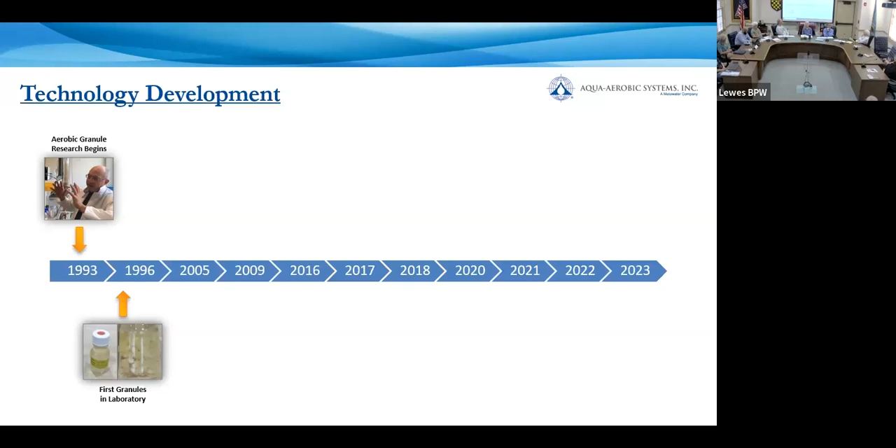But this actually started out born from anaerobic granules—they wanted to see if they could do this on the aerobic side of treatment, and they were able to. It did take a few years, and I think Mark won a bet with another professor, which meant he got a few beers at Oktoberfest that year. Then they partnered with Royal Haskoning DHV, an engineering conglomerate also based out of the Netherlands, and scaled this up into a full-scale commercial system. The first couple of installations were in 2005 and 2006 at industrial sites—edible oils and food processing.

In '09, they started up their first municipal plant in South Africa, and shortly after that, a number of plants in the Netherlands, and it has since expanded globally. It took a little bit longer, however, for them to make their way into North America.

Just how we work projects is a little bit different than what's done overseas, apparently. So they partnered with the manufacturer, and Aqua Aerobic Systems has a pretty long history with biological treatment with SBRs, and obviously have a decent standing in the wastewater community in the US and Canada. So we've been working with this for a number of years.

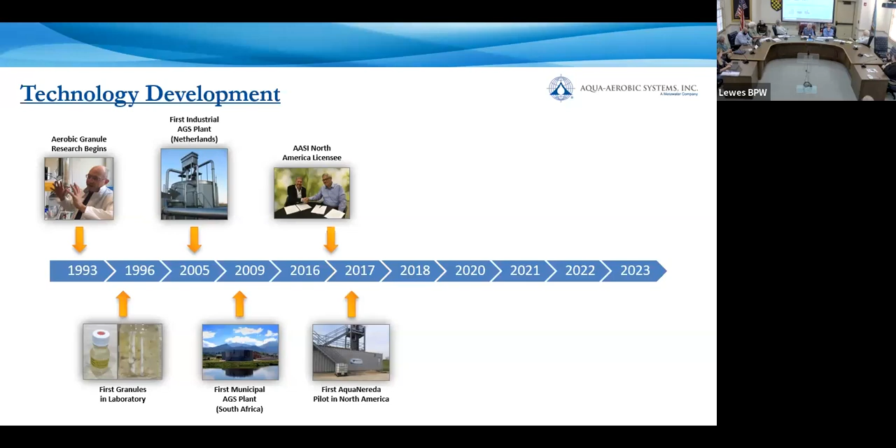And notably, did some piloting, started up a demonstration reactor in Rockford, Illinois, which is where we're based out of. So this is at the Rockford treatment plant. It's a 40 MGD facility, so a little bit bigger than what you guys have in Lewes. That's been running for about 5-6 years now, and it's operated by our R&D department. We use that for R&D purposes, customer visits, operators to come out and get accustomed to the equipment and control structure before they start up a plant.

So it's been very beneficial for Aqua. And actually what they're doing now is they began construction a few weeks ago on a 10 MGD Nereda expansion at their site. So they'll have their 40 MGD flow through just aeration basins, and then we will have that Nereda off to the side to take on some additional flow.

Back in January of 2020, we started up the first commercial installation in the United States down in southern Alabama. This is the Redneck Riviera down here. They're only about 20 miles from the Gulf Shore. And that's been run by, they call it the Redneck Riviera.

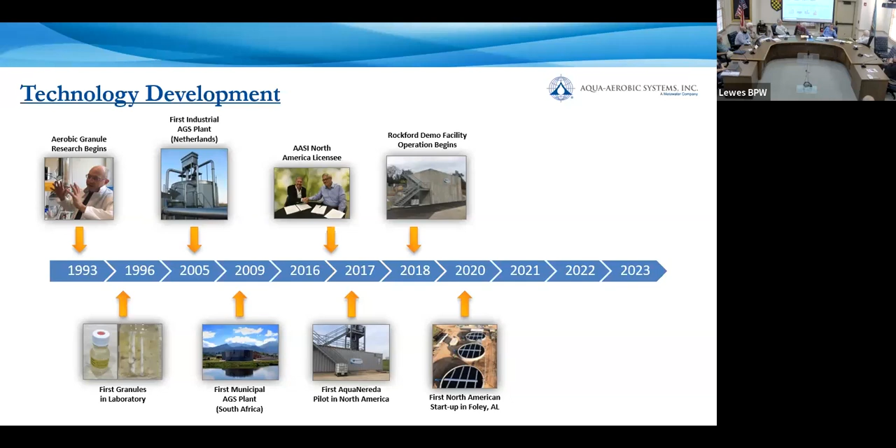It's not derogatory. That's not you. That's Justin, yeah. So the superintendent down there, Lee, he's actually had his eye on this technology for a few years. We were not licensed yet, and he had gone to the Dutch and asked, 'Can I get this?' They said, 'Well, no, we don't have a means of selling it to you right now.' So he was chomping at the bit to get his plants moving in this direction.

So we'll hit on that a little bit. 2021, there were 4 startups. One of those was just a 1-year-long demonstration for direct potable reuse in Oklahoma. They just presented a paper at WEFTEC this year.

Wolcott, Kansas was started up January of last year. And then this year, we are currently in the middle of startup 3 of 4. So it's been a big year for us. And we'll see that number probably be around 3 to 4 startups for the next couple of years, really seeing the technology grow.

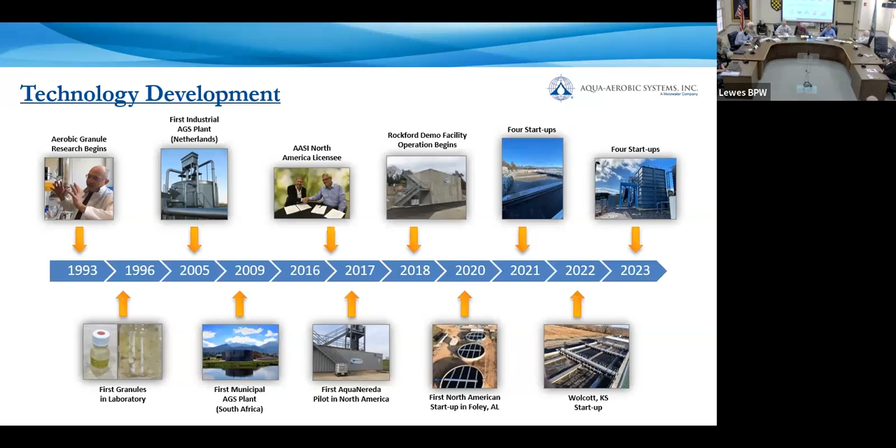So internationally, there are 70 plants running, maybe 71, depending on how my emails look at the end of the day. About another 30 to 35 under contracts. That means they're under design or under construction.

Again, global technology, it's been around for quite some time now - 20 countries, not quite on all the continents yet. I can give you guys the one that we're not going to be building on anytime soon. With that being said, though, there's a couple in Australia, Hong Kong, and Jeddah, Saudi Arabia is going to be quite large, so it has become fairly expansive.

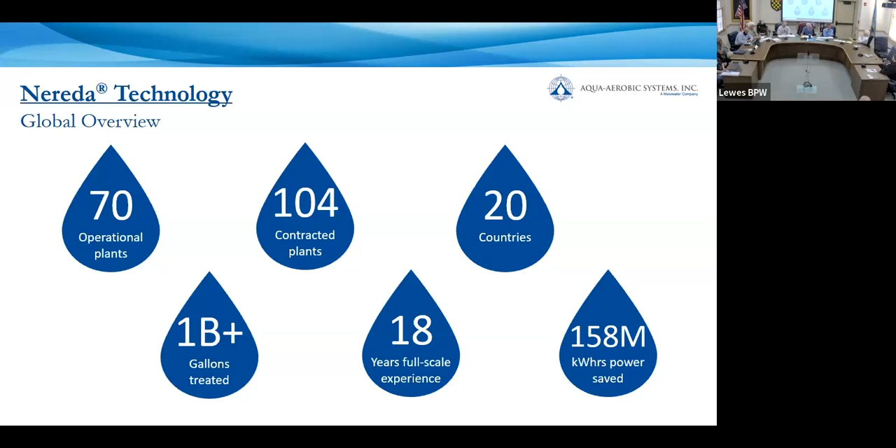And of course, the US and Canada will open a whole other door here.

Since 2020, how much has changed in the technology or the application? That's a good question. Application, not drastically different for the technology itself. I will mention that we do our own R&D work, even though we aren't the actual owners of the technology - we're really in a partnership with Royal Haskoning. Now they are a 10,000-plus person company and probably have the same number of people dedicated to the Nereda technology as we have as a company, but we still do extensive R&D.

So that demonstration reactor - one thing that was really important in the US was the ability to retrofit aeration basins or clarifiers. With the batching process, you're generally looking at about a 20-foot depth to ideally maximize your depth there for the batch volume. But what we did is we ensured that we built that demonstration reactor with the ability to move the decant weir so that we could test it at different discharge depths. So now we will design down to 14-foot depths.

Leachate is something we'll see here that we will apply it to. We don't have one built with leachate yet, but we have extensive experience with our SBRs with leachate, so we can apply that knowledge to the Nereda system as well. Nothing too drastic, but just some tweaks that maybe make it a little more friendly to the United States, and we continue to push and see where it can go.

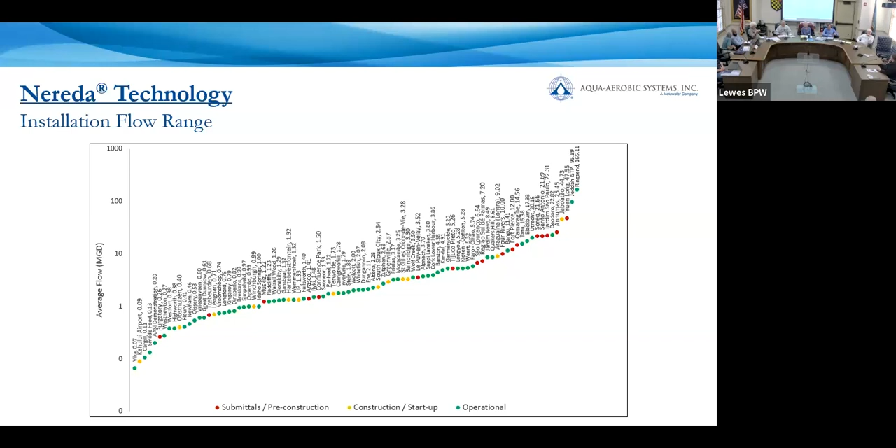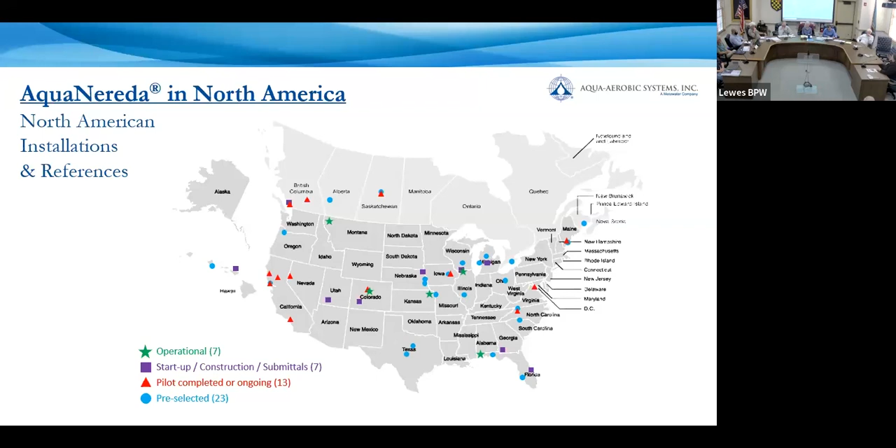Yeah, so we can be certainly well under. And then your nutrient limits, it's all stuff that comes down to the engineering - ensuring you have carbon to facilitate your nitrogen and phosphorus removal. So that's all stuff we'll talk about with the engineer during the design phase, but again, we want to make sure our data is good, that we're basing everything on.

All right, so where the benefits come from - we're able to get this because it's similar to a batching process like an SBR. We're using an adjustable cycle structure.

So when you talk about operators and what training they may need, anyone with any sort of wastewater background should be able to jump into this, and with some additional training learning the new technology, they'll be able to run it. Someone with SBR or activated sludge experience in general is really beneficial to have, because they're going to be able to recognize when something may be off.

If you see too much scum or too much foam on that reactor, they'll know to identify that it doesn't look right. The same causes of an activated sludge upset are the same that we would see with a Nereda, because it's the same biology. So generally you're looking at the same cause.

We should not be affected as much by any sort of unpleasant conditions coming into your site, so it's still quite similar. You see much more rapid settling, and then obviously you have the enhanced nutrient removal, again, with the batching process.

Tom, do you mind grabbing my purple bag there? I have granules in there I forgot to take out. I want to pass those along.

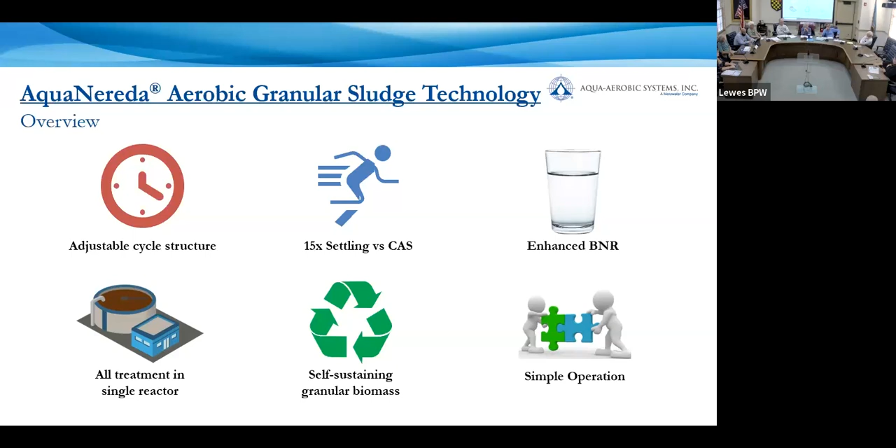So let's get into that now, because we'll start answering some more questions. This is developed just through the system itself—it's self-sustaining. This is how we get them: by wasting out the filaments, any sort of floc material we don't want in there. That is up to operators to gauge and keep an eye on. So it's not like it does this on its own; it still needs someone to watch it and keep an eye on things.

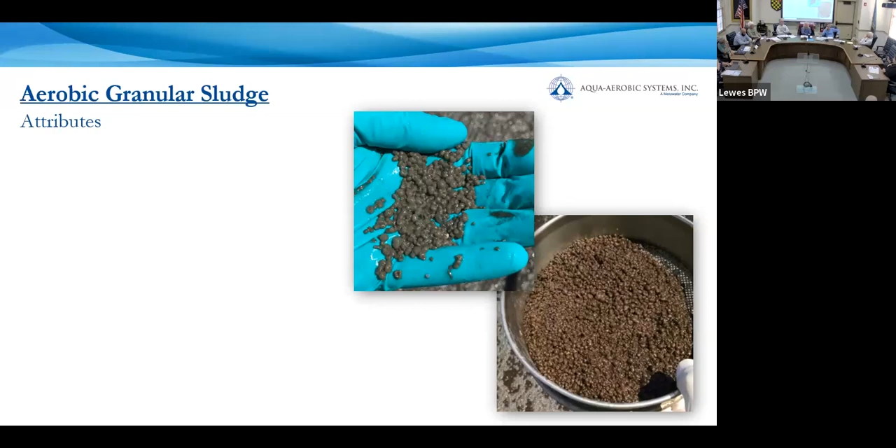So just taking a step back, what exactly is this in here? We talk all about Nereda, which is the technology name, but this is aerobic granular sludge. This is something other plants can grow if they have the correct selection mechanisms, but no one else does at the moment. We get these developed again—no media carrier, we're not adding in any chemical for this. It's fully a sustainable process through selection mechanisms in a cycle, which we'll see.

We need them to be at least a minimum diameter of 200 microns to get a dissolved oxygen gradient to develop, where you have aerobic conditions on the outside and anaerobic in the center. This is how we're eliminating the multiple tanks for treatment, in terms of getting your different treatment environments. But you have all the biology in there, which makes it more robust and resilient.

Not to derail, but a couple of examples—one would be Idaho Springs. I got a call from Ed back in, I think, early March on a Monday night around 6:30. Ed knows what he's doing. We have a 1-800 customer, 24/7 customer service line, and this was the end of the day—it was weird to be getting a call from him. He said, well, I have pink effluent, and he sent a picture. He had red sludge with that.

I said, well, that's not something the system is going to be making color unless you're dropping food dye in. Well, they weren't dropping food dye in, but a local car wash had done maintenance the previous Thursday—I don't know why we add dye to our car wash soap, but we do. They leaked 20 gallons of dye into the collection system over the weekend, which for a plant that sees 300,000 gallons per day ends up having a big impact. That dye is hydrophobic, non-biodegradable, and toxic, and you could see the impact on the system. The operator left Friday and came back Monday morning to reactors that had gone from green to pink.

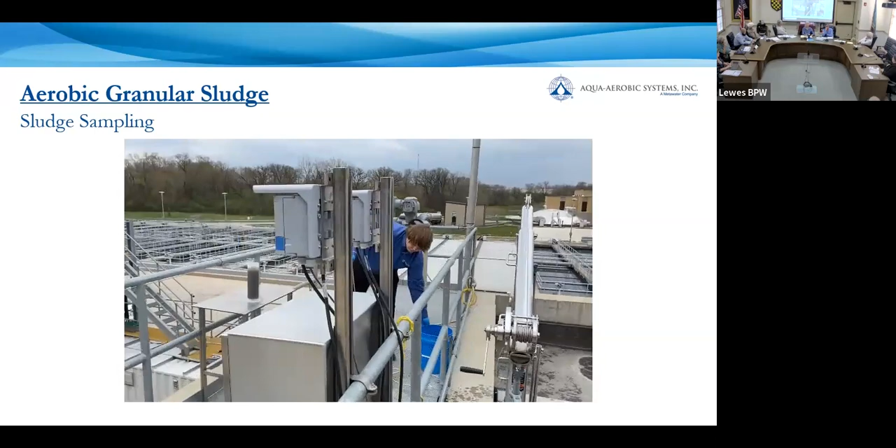This is our demonstration reactor in Rockford, Illinois - the Four Rivers Sanitation Authority. It's a 40 MGD facility. You can see the primary clarifiers in the back, and they're actually replacing a bank of those with our filters, our primary filters.

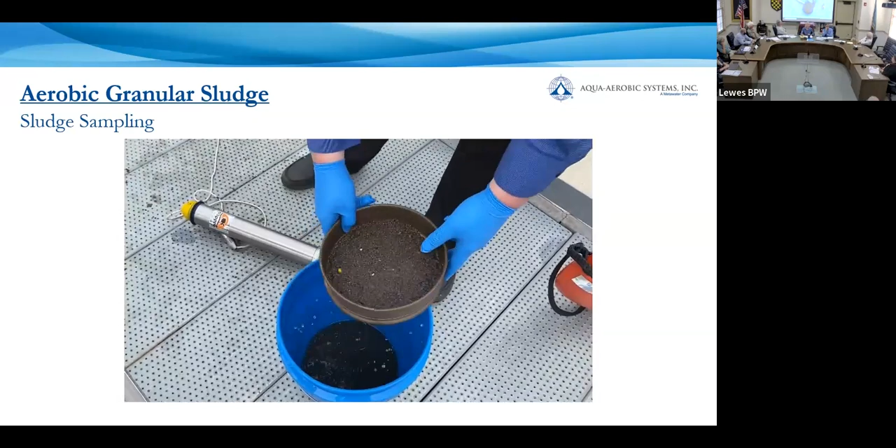So again, this is a 200,000 gallon per day reactor here that Daryl is the main operator of. You can see he pulled the granules out - this is something operators will do as one of their tests. He's dumping that through about probably a 2 millimeter soil sieve. And these are what they look like out of a nice mature system that's been running for a while.

So it looks kind of fun - a lot of people call it wastewater caviar. Compared to sludge you pull out of a conventional plant, that's just going to run through a sieve for the most part, but this gets held on. Now you have varying sizes.

They start off as tiny little black dots. After you seed a plant, within a couple of weeks you pull your sludge, run it through a set of soil sieves, and you'll start seeing just tiny little black specks - that's what they start off as. But as you pick them up, we can pump them.

We pull them out of our Nereda demo reactor here for pilots, and we seed it with that. So they have some sturdiness to them - they aren't just going to fall apart if a breeze comes by. They take a bit of pressure to pop.

Tom's heard this a million times already, but I think they're similar to mints that were around about 20 years ago - you'd bite into them and bite through the membrane, and there'd be a burst of liquid minty freshness. So I haven't eaten them, but they are very similar.

Take your word for it.

Well, you could bring these home to the wife one night and say, I got this caviar for the evening, what do you think? But they are sturdy - it's not just a little bit of a press, you gotta pop them a little bit.

So they get pumped okay, and they're not just going to disintegrate, but they're also not going to affect the solids handling negatively - we'll get to that again later. So here's your spectrum of activated sludge. On your left-hand side is flocculent sludge, so that's kind of what gets left behind if you were to drop it through or dry it out.

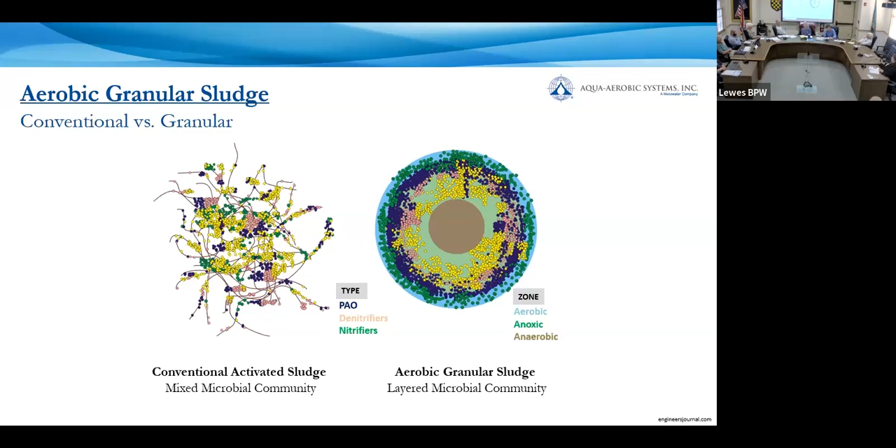So with the granules here, kind of going back to that robustness I was talking about and why we have that more rapid recovery when you do get upsets—I don't love getting a call like that, but it's good to see how it rebounds.

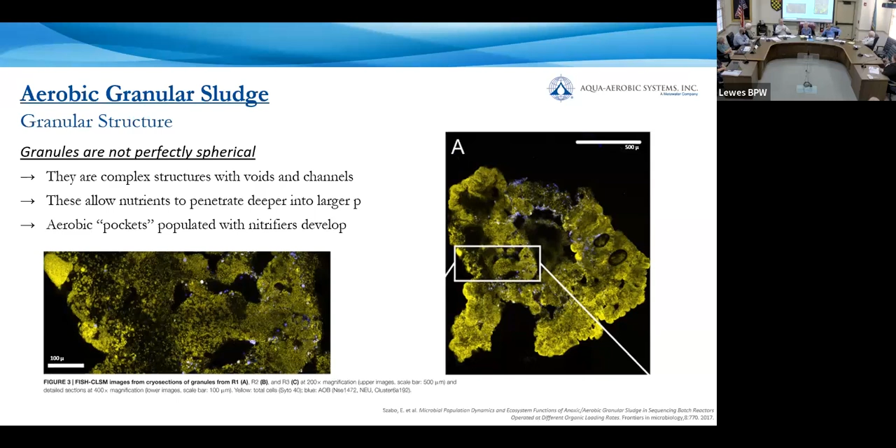I'll try to think of any others if they pop up while we've been going through this.

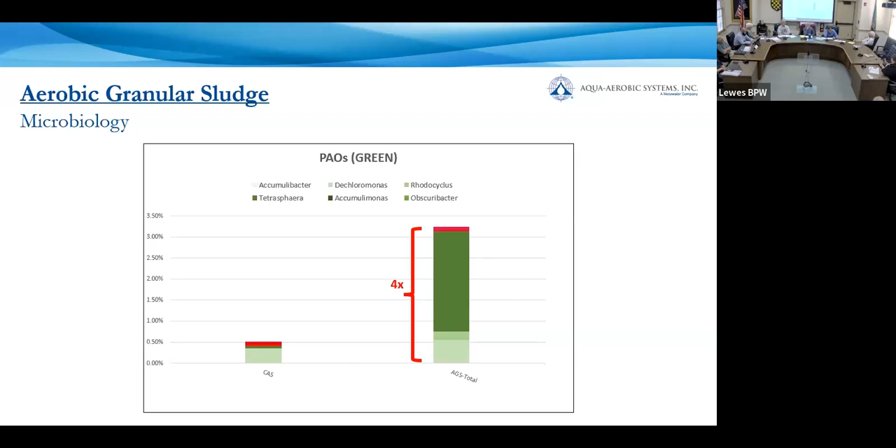This is just a little marketing video — if you guys ever make your way out to Aqua, you get to see this in person. These are sludges pulled from our demonstration reactor on the right, and then from Rockford's plant's flow-through system, so they take on the same influent. Rockford does have primary treatment, and we just take on raw influent to our demonstration reactor. Essentially, you can see that the AGS settles pretty quickly. This was cleaned and run through a sieve, so there is going to be some component of that flocculant material at all times because you always have fresh influent coming in and you're always in that granulation process, but it settles significantly faster.

And that's just some off-gassing off the other one there.

Okay, where do granules come from? So this is where we're getting into it — we'll start seeing how these all come about. When we seed, we start with conventional activated sludge, generally with a new plant. In the Netherlands, they'll throw in some AGS because their plants are like an hour from one another. No one in the US is paying to ship gallons of sludge across the country, unless you're doing a pilot maybe. So it takes maybe about a month longer to hit full granulation when you start up, but we still operate to ensure that we're meeting your effluent targets at startup. So that's a couple slides on that, but I wanted to get that out there so we don't have any concern about the time it takes to granulate.

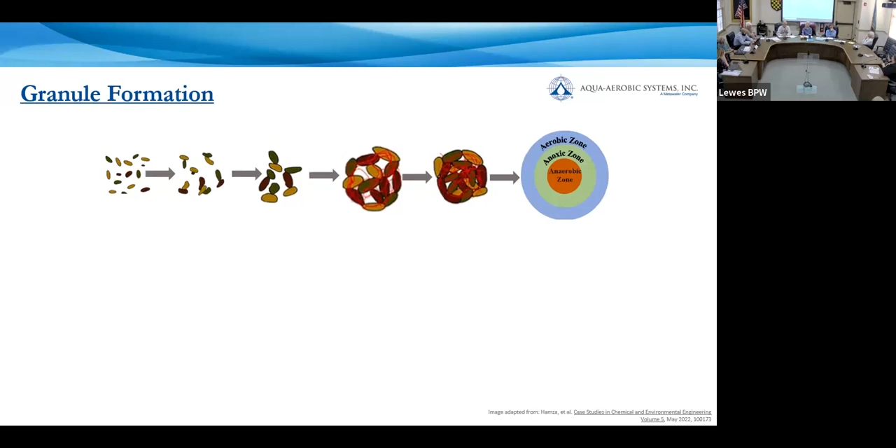So I think I hit on these — true biology, all biology, no media carrier. This is developed just through normal everyday operation within your reactors. You're not buying them from Amazon or from Aqua. There is attrition, you do lose them purposefully, but it's not like a plastic media that you would add in there. We just form it from the conventional sludge, and it just replenishes through normal everyday operation.

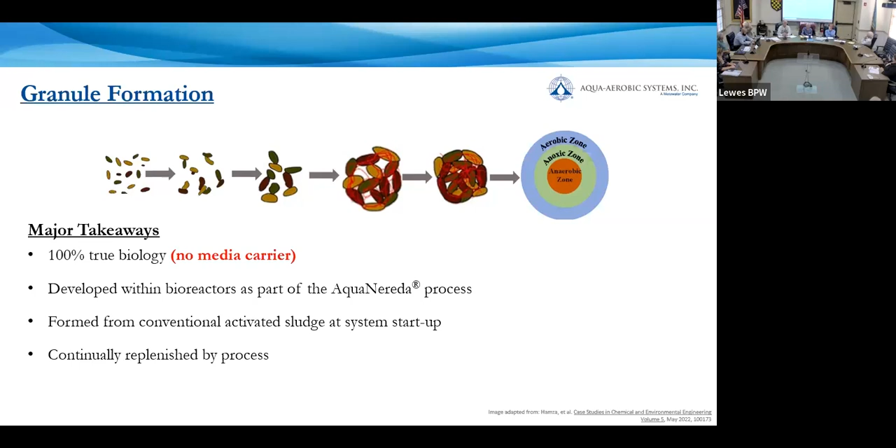So as those granules get bigger, obviously the settling improves. You're going to increase the biology in there, which makes it a more resilient process. But where exactly do these granules come from?

There's 6 main mechanisms. Hans, you might want to read this paper by Edward van Dijk, I can send it to you after this, anyone who's really interested on the wastewater side of things. There's 6 selection mechanisms that have been identified. Here's that breakage where I even mentioned how the big granules fall apart and become tinier ones.

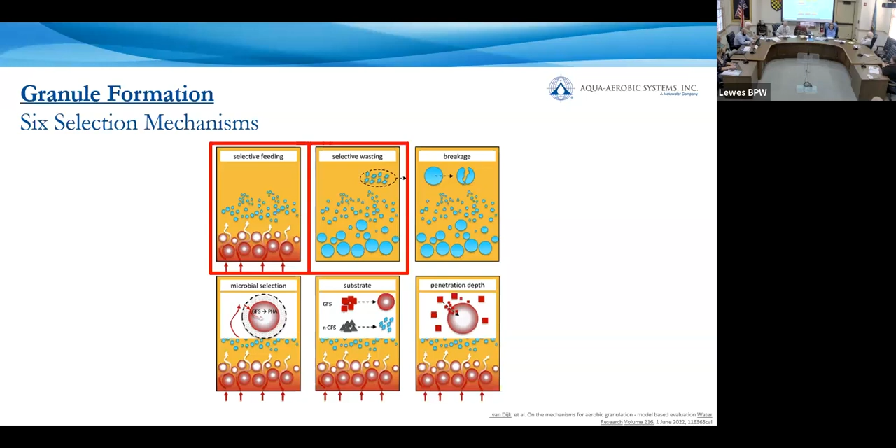The 2 main ones we'll look at are selective feeding and selective wasting, which are really nothing new. It's just how they're applied and utilized within a single operation here. Even things like your substrate type, certain substrates facilitate more growth and so on, but these are the 2 that operators have control over, unless they add certain substrates, but probably not necessary.

So the first one is hydraulic selection, which is essentially just selective wasting, which is nothing different. A lot of plants employ it in one way or another, or they Frankenstein it in to get rid of filamentous bacteria. How we're designing this system is to ensure that we selectively waste every single cycle, but we're doing it within the reactor itself. There's no surface wasting on this, unless we have scum removal, which we can also talk about.

So what we do, and we'll see an animation on this, is let the heavy, dense sludge settle. Even when you have conventional activated sludge at seeding, we'll start off at a 45 to 60-minute settle time, and just within a week, you're going to start seeing that settle time decrease. We help operators determine how you do that. But just so, even when you have conventional sludge, something will settle heavier than the rest of the sludge in there. So we just start wasting it out like that.

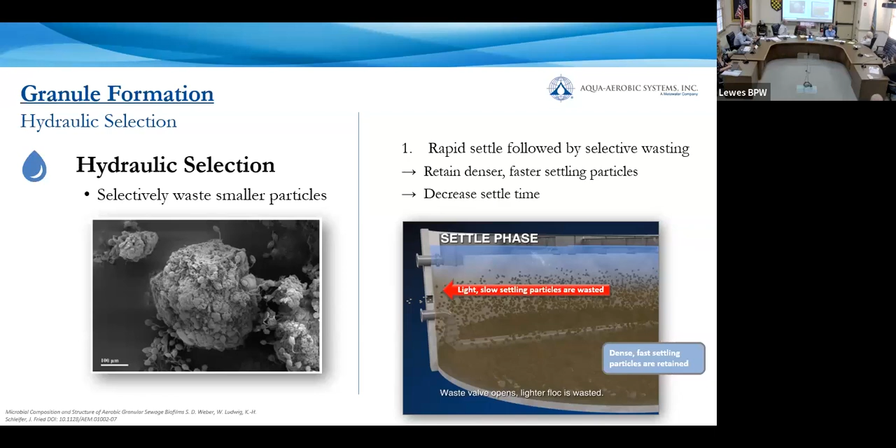And then the second selection mechanism, which is biological, is actually even more important. I know there's a little more wording on this slide here. So what we're doing is we're selecting for PAOs, those organisms I was talking about, the phosphorus ones. We want those because they secrete something called EPS, an extracellular polymeric substance, and we'll hit on that with solids handling too. But that EPS, the polymeric, that's a biopolymer.

And so the biology is going to begin binding to that, and that's going to start making it bigger. That's also going to give you the biology within the granule as well, where it's not just a solid center of some carrier, it's still a natural substance. So again, just within a couple of weeks, you start seeing these specks occur, but we do this through an anaerobic fill draw. I talked about how we don't want any oxygen or nitrates in the system when we're filling it, because we don't really want too much aeration in that influent buffer. We'll go anaerobic pretty quickly in this because we aren't going to be aerating it at the time.

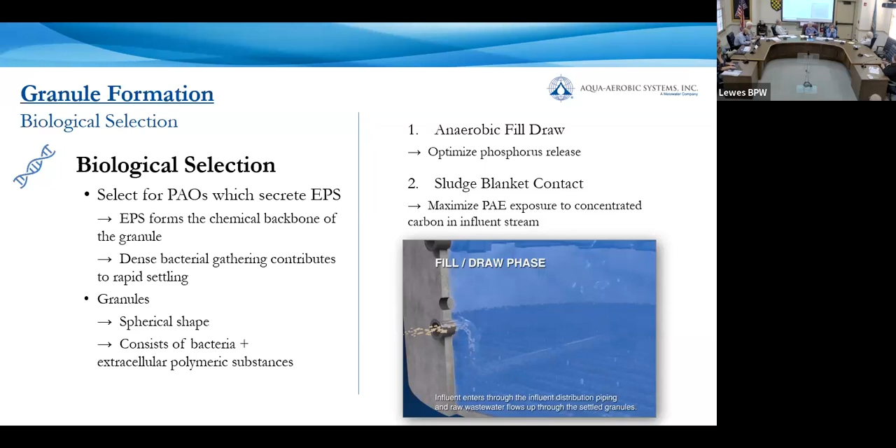But essentially what we do is we optimize that phosphorus release. As we get into the animation, it's tough to tell here, but essentially what we're doing is giving a settled sludge blanket preferential access to all that influent carbon coming in. They're going to eat that up, and then they're going to cleave off that orthophosphate and secrete a lot of that biopolymer with it. So again, we want that biopolymer. We'll put it together in a slide or two here.

Wouldn't it also be nitrogen? When you're in, because you'll be anoxic kind of at the beginning, you'll get some denitrification, but you go anaerobic fairly quickly.

We did have an issue at our plant in Nebraska. They sent tons of nitrates back to us. I had been having a tough time granulating there and was seeing some sludge lifting. They weren't running their aerobic digesters correctly, weren't aerating them properly at all, and they started sending back huge returns of nitrates. So that's where I found an issue, but now they're running the digesters properly and there's no issue.

We're getting anaerobic pretty quickly in that phase now. They have an anaerobic lagoon up front, so they come in pretty low. So I knew there was an issue, and I'm like, well, it's not DO carryover because my DO is low, so there's something going on in your return stream. So returns are something that I try to really look out for in this process when I'm operating it or helping operators run them.

No, we're going to use fixed fine bubble diffusers on the reactor floor, just to get the nice lift and mixing throughout. You'll see on top of the reactor a series of effluent weirs. And we wouldn't even use an aerator on an SBR. That would be more for a smaller, older one, yeah, small.

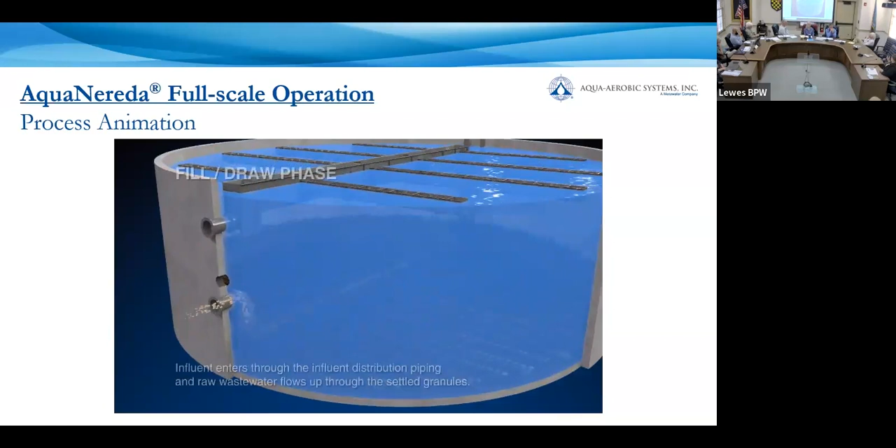I'm going to stop this real quick before I go into it.

And then the other thing I want to point out is there's no secondary clarifier, which is what a flow-through system would have. They would have all those selection basins and then a final basin to settle everything. So with that batching process, we have all those selections occurring in there and we're settling at the same time, which we'll see coming up.

So this animation is a batching process. We're running on a cycle time, so again, we can say 6 hours is fairly standard. You're going to have a fill-draw period, let's say 2 hours if it's a 3-basin system. Then we're going to have a react period. And then that very end is going to be your settle time with the waste discharge, which should be less than 30 minutes when you combine it all together, usually like 25, 20, depending how much you're wasting out.

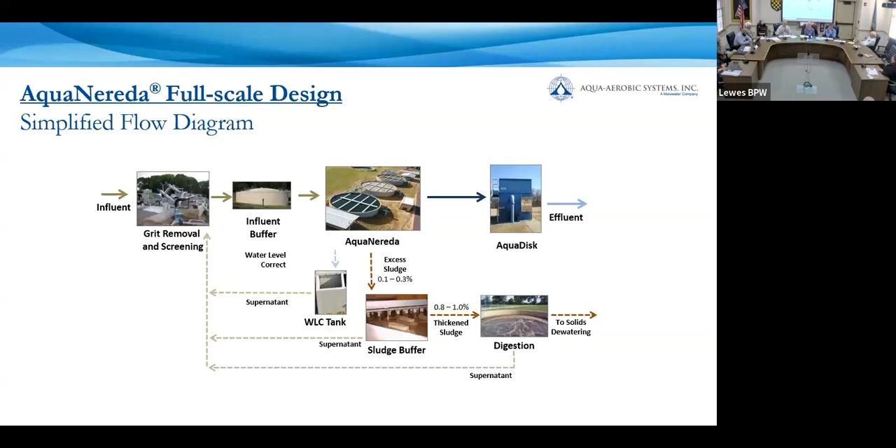So let's get into that. So this is our reactor here, and it's one reactor per plant for this animation. It's circular, it can be rectangular.

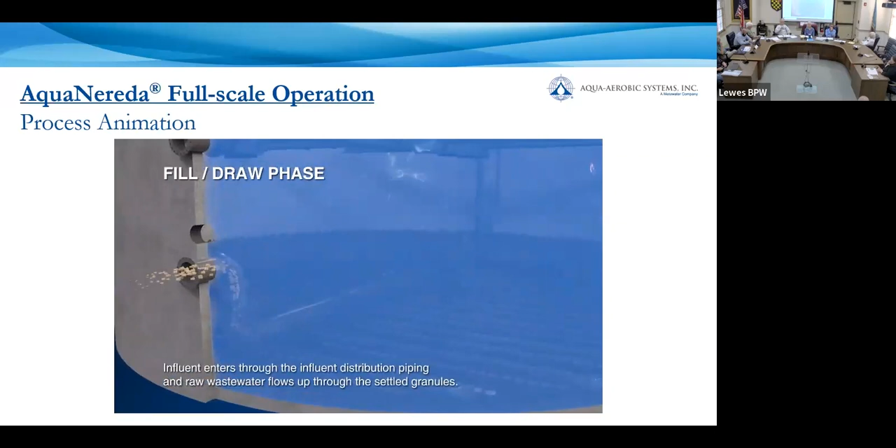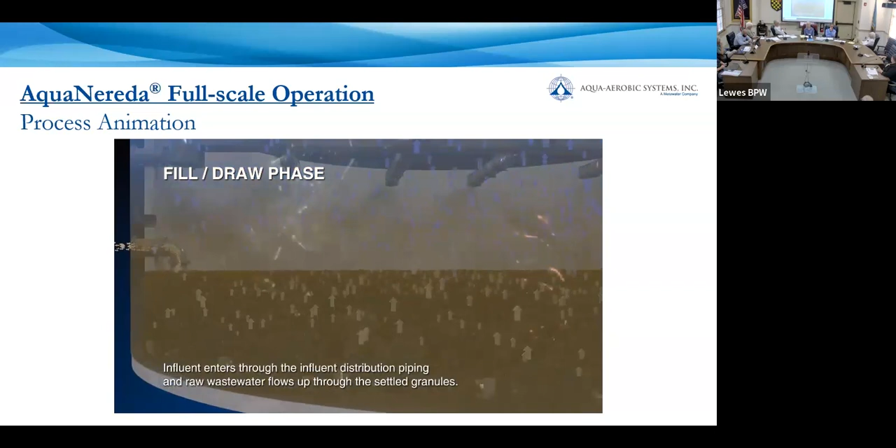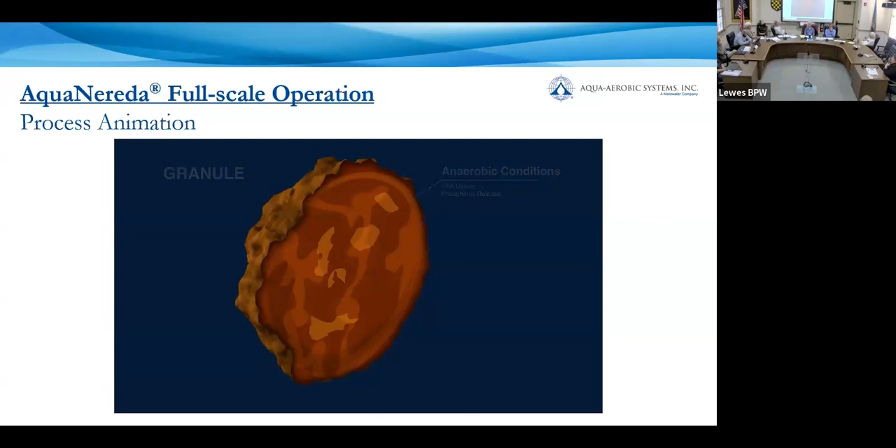We're starting with a simultaneous fill-draw phase. So as we're filling the reactor, we're filling it and coming up through a settled sludge blanket. You can see those arrows spread throughout the reactor floor because we have a distribution grid there. It's coming up through that sludge blanket and giving all those PAOs - they're eating up all that carbon. You can see it has VFA, volatile fatty acid uptake. And as it's doing that, it's cleaving off that orthophosphate, so it's the phosphorus release there. So you actually see your phosphorus concentration in the reactor increase during this phase.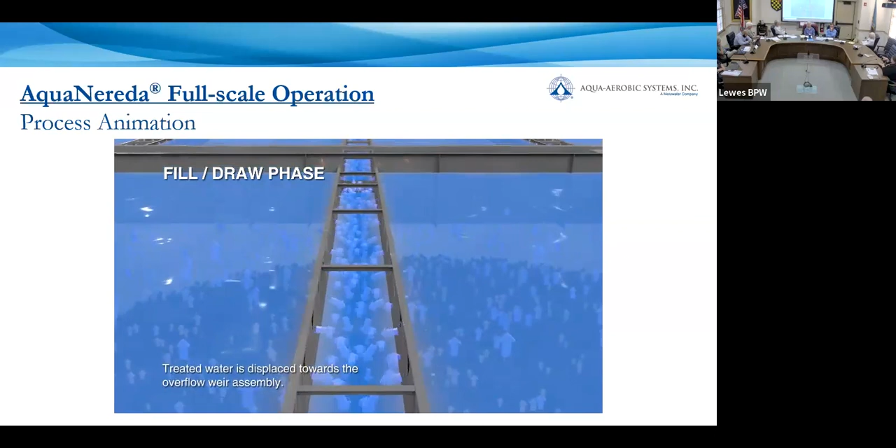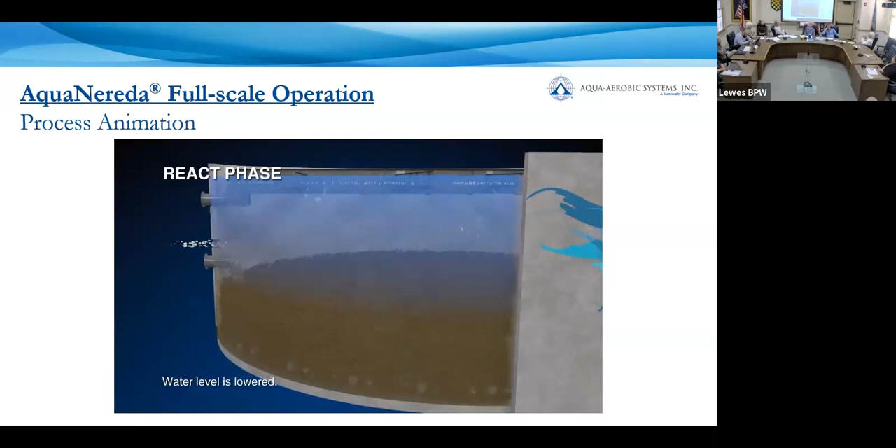And so as we fill it, we're going to simultaneously decant through a series of fixed effluent weirs. So you can see there's no mixer in here and there's also no moving decanter. So we have a full hydraulic design with this as well to ensure that we aren't going to get a breakthrough occurring or short circuiting of that influent getting to the top too quickly. And here's that water level correction - notice we're dropping that water level about half a foot there. So it's a small amount of water, but it comes out pretty quickly. So that's why we have that small tank to equalize it before it goes back to the headworks.

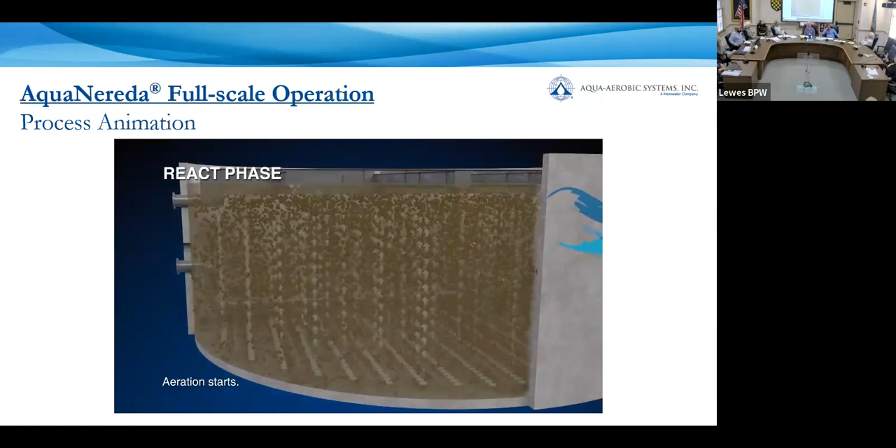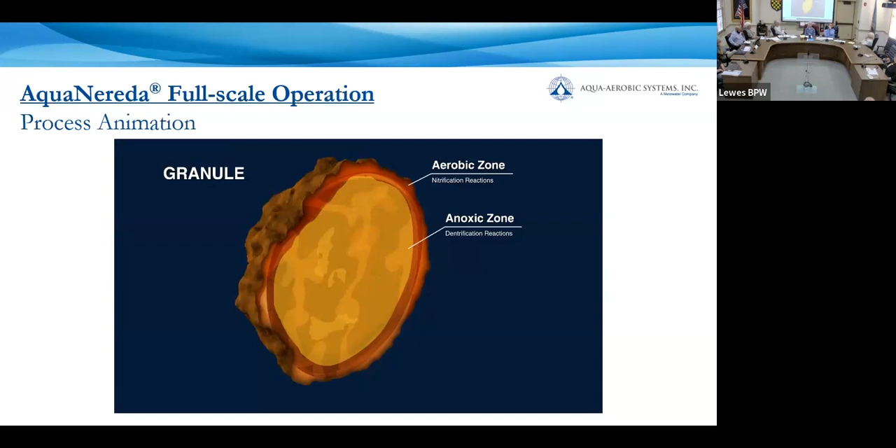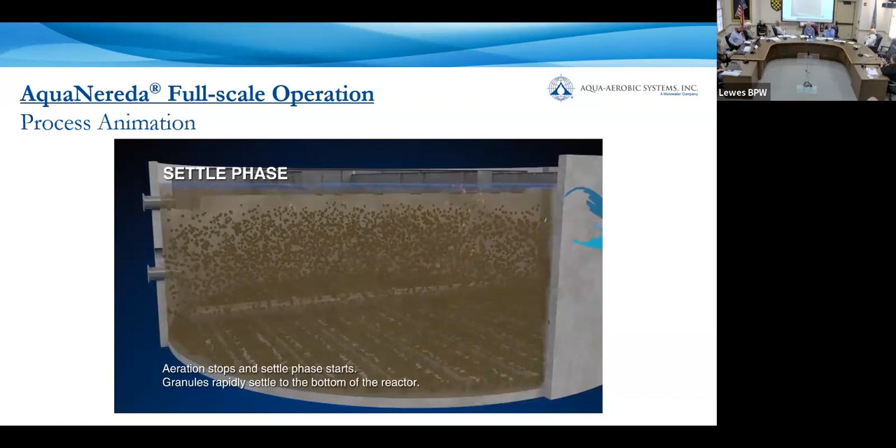And we dropped that water level because our air blowers kicked on here, and you can see the diffusers at the bottom. Blowers are going to be site specific, kind of based on the operators' and engineers' experience and demands or wishes. But as you get oxygen into the system, you obviously get your nitrification. Then we're also going to get denitrification because we have that nice big granule there. This is where you're going to uptake all of your phosphorus, and then you're also obviously getting your carbon reduction as well. And then, as I said, there's no mixer - you get enough mixing energy just from the aeration system because the viscosity of the bulk liquid is a lot lower than conventional sludge, because those solids are bound in the granule.

And then the settle phase - blowers get shut off, pretty simple here.

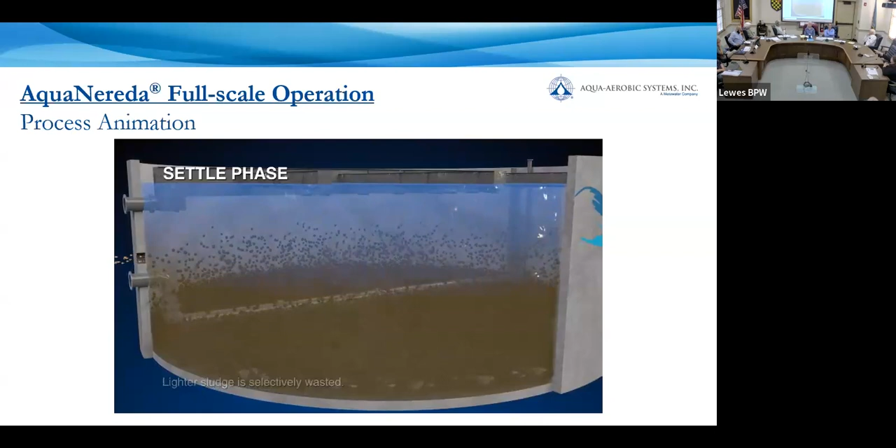We're going to let it settle for about 15 minutes, and then we're opening that waste valve again. That's what we wasted that water level correction through. There's another pipe, shaded out here, running across the center of the reactor that's pulling out that fluffy filamentous sludge. That's how we're deselecting for the filaments. I don't have too much of an issue with filaments, unless I'm in the startup phase where I'm still predominantly conventional.

Not to have your floating decanters in a system like this—I mean, why not utilize that? So that is going to negate that plug flow. How we filled this reactor was we filled the water to distribute across the entire reactor floor and come up at the same time. So with a traditional SBR where we do use a floating decanter, you don't have the plug flow operation. You just dump water in there and it gets mixed up around.

What we're doing with this controlled feed, that sludge blanket, is our biological selection that we need to granulate. If we're feeding across the reactor floor and the water is coming up, a moving decanter wouldn't cover your reactor surface to evenly withdraw the water. Even withdrawal, making use of the space in the tank. But it would localize that area there.

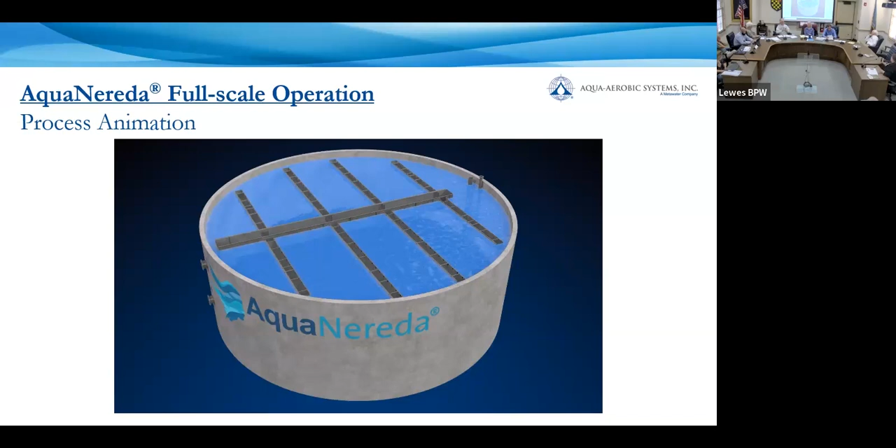Good questions, guys. So at the time of diffuser maintenance, you have a sump in the tank, and there's a lot of different ways you could do it. You don't need to have it—you can drop a sump in there. What I try to do is settle everything and decant as much as we can through that water level, the sludge grid. It's about halfway down—you can pull a good amount out and then pump out the rest.

Just drop a sump pump in there. Even some plants, with their hydraulics, you could send all your flow to another reactor. We did have to take one reactor down at one plant due to a failure on one of our sludge launders. It happened, and it could have been an installation issue. Obviously our mechanical team has reviewed all the drawings to ensure we are adequately supported. In the future, it could be specifying to vendors where certain welds are made, but that's a reactor we'll need to take down and get in there to see.

I'm kind of excited to see it too, just to see how things look after a few years now that we've been running them. But it should be a pretty easy process. We do have a lot of grit, so we'd need a grit removal system, because otherwise it would be an issue. You want good screening up front for that diffuser grid. With MBRs though, you need even better screening. And a good grit removal system is recommended.

We're again seeding that plant in Georgia. They had a huge failure of their grit system, so even getting sludge to seed their reactor has been a bit challenging, because we're trying to avoid grabbing that grit that's just settled to the bottom of their aeration basins. It's not ideal to have in there, but you definitely want good headworks as well. You don't want grit in the system, it's not a beneficial solid, it doesn't have any biological benefit.

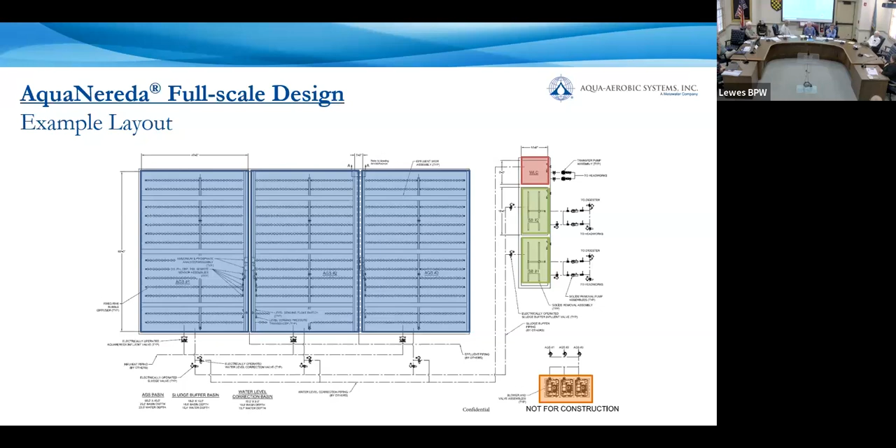All right, moving into major advantages, really I think kind of an advantages and operations thing to see how it all comes through.

So when we compare different technologies, I'll focus on the MBR. When you're looking at a life cycle cost, your MBR is usually your worst case scenario when you're not assuming land acquisition costs come into play, so obviously little footprint there. And that really comes from the energy requirement, MBR is really your worst case option for energy. However, it gives you a very small footprint and very high quality effluent, so there are certainly drivers to pursue that.

But the Nereda is going to have that same footprint here. We are also running at a very high mixed liquor concentration. MBRs, I think we design ours around 10 to 12,000 milligrams per liter, and the Nereda's at 8,000 milligrams per liter.

However, you see more energy use on that side because their oxygen transfer efficiency is going to diminish as their mixed liquor concentration increases. Because they're that flocculent sludge, that aeration system has to work harder to get enough oxygen over to those bugs, because it's hard having to fight through that viscosity within the liquid. We can run at that higher mixed liquor without seeing your oxygen transfer efficiency decrease, because we're not having to fight all that extra viscosity in there.

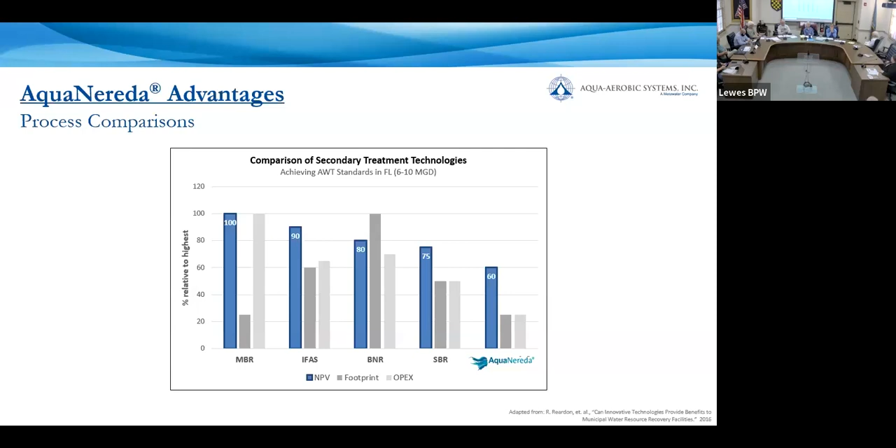All right, so I kind of explained all this, but I probably should have jumped ahead because pictures are so much easier. So here, Barbara, this is perfect. See how it's showing you these different tanks here? That's what I mean by a batch, where it's all one tank.

You'll see plants, as they get larger especially, will have multiple trains of these, 2, 3, 4 of them, to get more flow through. So with the Nereda or even an SBR, you're just doing a few tanks. To me, it's less of a headache if one of your tanks goes down, you don't have to take a whole train potentially offline.

So this was only 2 MGD. No, 2 MGD - yeah, this is not Chicago. Stickney, we have one of the largest treatment plants in the world, is in Chicago. It's 1 billion gallons a day.

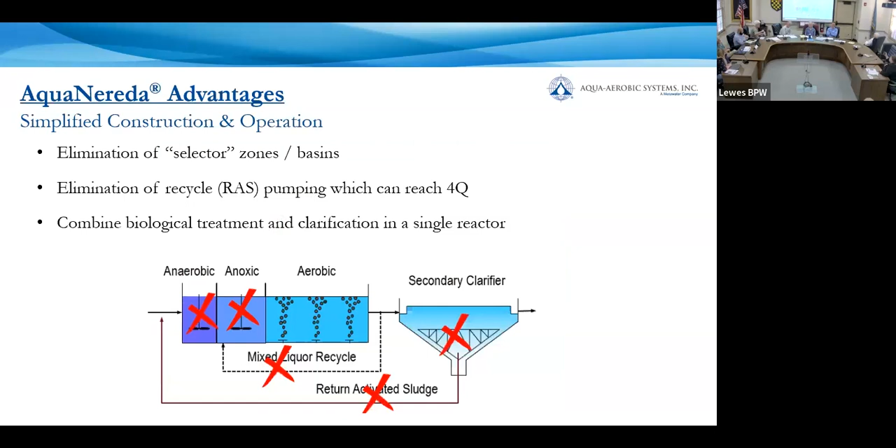No, well, and these were phased in, those first 2 ditches - that's an unfair comparison. No, well, I don't think it's that far off though. I don't think they can get down to half an acre like we can. You can, but it wouldn't look as big as that. No, it's not gonna, you can't run them, you can't do 3.5 MGD through it, you don't have the volume there.

So essentially, for 3.5 MGD in a ditch, even if you don't account for the spacing there, which you need some spacing between those trains, they still would have only been able to add on 1 more train at this site based on what they've done already. So that's, if it were a greenfield site, maybe it's a little different, but this isn't - they have to work in that space there.

Other option, sure, could they have demoed this and built new ones? Maybe, but then they're losing treatment capacity and they can't do that while they keep the plant running. They couldn't take a whole line down because that takes up a third, or a quarter to a half, of their flow. So, no, this is not laid out ideally. But what would they have done here? They would have added another ditch and still not be able to meet their design needs, because we do see tropical storms, so we do see high peaks up to about 6. And those ditches were losing sludge during overflows.

They have 10 acres of lagoons with 40-year-old sludge that's been sitting for decades, plus storm flow sitting there because the system wasn't able to process what they needed. So now they've been desludging those lagoons, sending as much as they can through this Nereda. I get returns, but they don't have a flow measurement on that return line, just a quarter or half turn of the valve, no actual flow measurement. So sometimes coming in I could have up to 25% of my flow, if not more, coming from those lagoons, and that supernatant has ammonia and phosphorus at about 100 milligrams per liter. They're pounding it through this system that those oxidation ditches could not handle. So there are big benefits in doing this, and in the effluent quality out of the Nereda versus those ditches, even past just the footprint savings here.

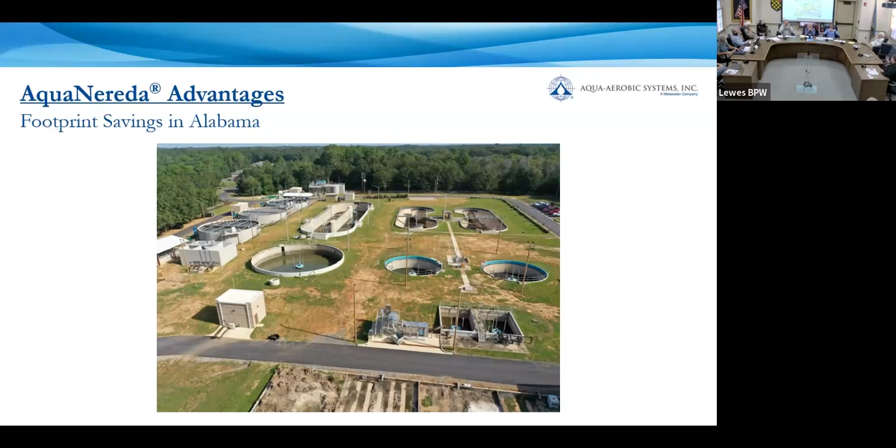So yeah, they've been running almost 4 years now though. I'm guessing they had their storm events. They had big time storms back in the day, they've had some big storms.

Do they have salinity issues? They used to, they still have some, I don't have issues with my process, but that was one of the reasons he sought out the Nereda, because it's supposed to handle salinity better. The Ringsend plant in Dublin did a year-long study, I don't have pictures of the Ringsend plant but it's beautiful, right on the Irish Sea. Again, the double-decker reactors, but there is zero room for expansion.

I have not shown you the Whitefish, Montana ones yet. You hold your tongue on that one.

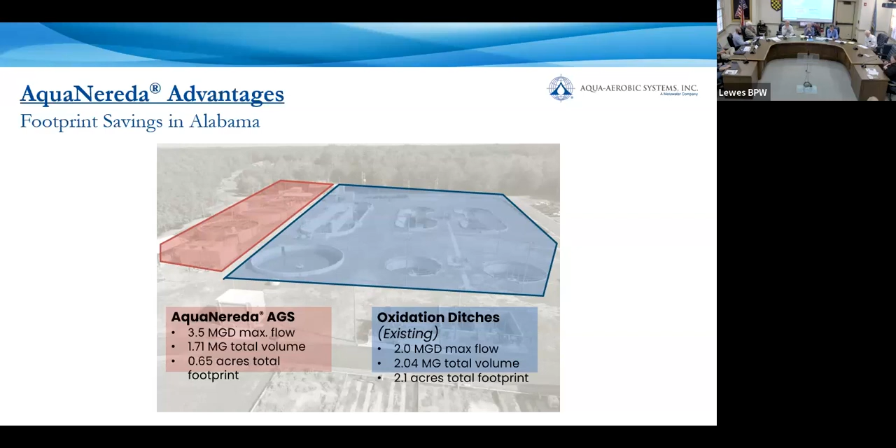But no, the Dublin plant, they are right on the water, there's no room to expand there, so that was a footprint savings. MBR would be insanely expensive for 150, 160 million gallons per day, but salinity intrusion is a big issue at that plant, and even with their SBRs, which were run well, they'd have a lot of issues with that. So that was one of the reasons that plant in particular, the work they were doing then, which was still a pilot, was why Lee wanted this at his site, because of the salinity issues he was having. They've been working a lot on the I&I to solve that. Rockford, our plant, has been working on a lot of improvements to the I&I issues we've had over the years too, so it may not be as much of an issue now, but when we started up, it was.

Are you going to get into that salinity business and its ramifications on your process more, or should we? No, but we can definitely take notes on that. I don't have any hard data on it here, but we can just. We don't have. Yeah, let me see if it brings up.

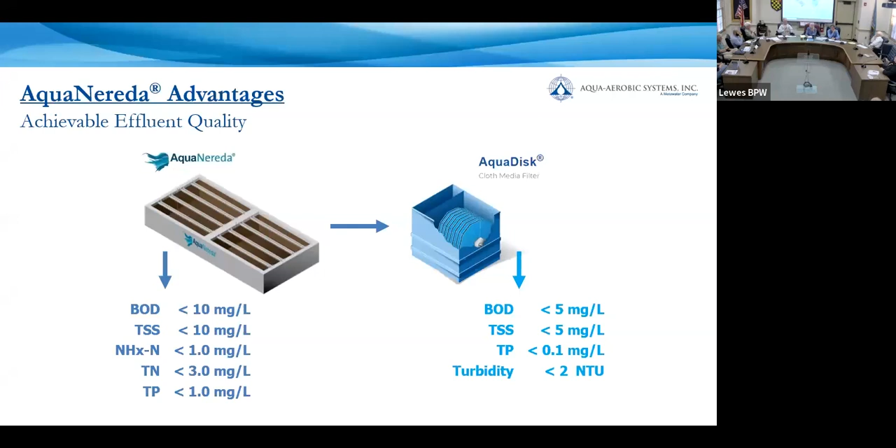So I don't think you guys need to do that well with your phosphorus here, but the polishing is nice. We have about half of our plants with filters and about half without, so it's kind of just site dependent. Most plants want it before, most UV manufacturers will want it beforehand. My Whitefish plant does go straight from Nereda to UV though, without any disc filters. The Wolf Creek, is that discharge? Yes, they discharge to Wolf Creek. Yeah, I just want to see that. Yeah, oh yeah, yep, all of our plants do. You should be able to search them all up.

All right, getting into how you actually run this, more on the operations side. So I probably should have done the equipment list first, now that I'm thinking about it. In terms of equipment within the reactors, all you have are those disc diffusers. The piping grid is not what we would call really equipment, because you don't expect an operator to do anything to maintain it. What you do have are the instruments.

So we have a minimum of DO for your dissolved oxygen, pH, and then your ORP, pH and ORP, a little bit kind of similar, to help us gauge our environment in the reactor. And then the final one that'll be standard is your TSS.

So if you're looking at a pretty basic plant that really needs just BOD, TSS, maybe a higher ammonia limit, no TN, no TP, we can run it just off a pretty basic set of instruments there.

Just for good practice, you always want to have a certain amount of time for your aeration period, maybe 45 minutes to an hour for a standard plant. So as you're running through that react cycle, it's going to make sure you're running for a long enough period of time that the operator has specified.

The operator will also specify a DO set point, usually 2 milligrams per liter for most biological systems. And then we're also going to specify a pH stopping condition as well, because that's going to help ensure we've gotten enough nitrification. pH can be used as a surrogate for nitrification, because that nitrification process eats up the alkalinity that comes in, and as that happens, your pH decreases.

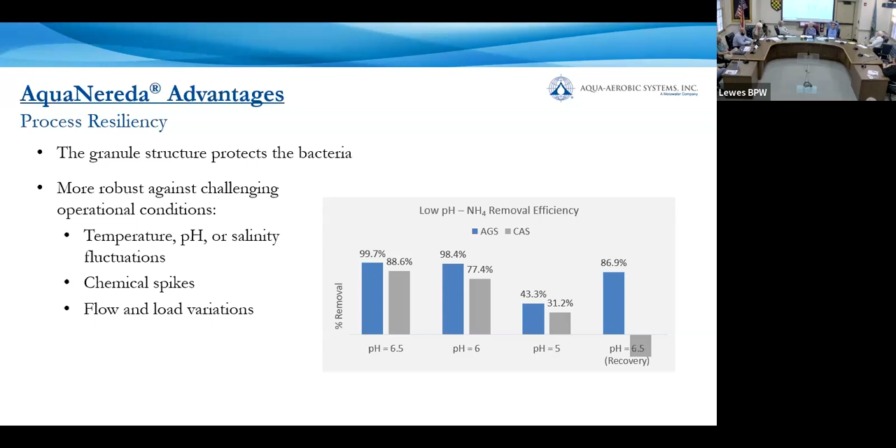I think focusing on that Idaho Springs and some of the full scale upsets we've had is useful. Another operations point here is how we manage peak flows. I mentioned earlier about improvements to the programming, where the interim program that would just be run off the PLC is going to be able to respond to flow conditions more quickly.

What the Nereda runs off is something called a Nereda controller, that we provide the software structure and programming for. What it'll do is take in that flow meter signal and read it on that controller, and it'll say, well, I have a lot more flow coming in, and at my current cycle structure I'm not going to be able to fit enough through during that fill period. So what I need to do is shorten my cycle time up.

And in this case, say from 4 hours to 3 hours.

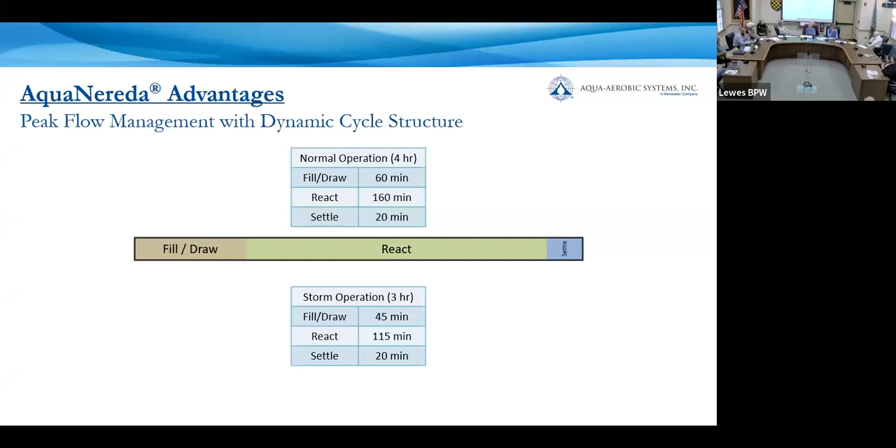Where's my clicker? Oh, well, we'll go on to the next one. This is a good one.

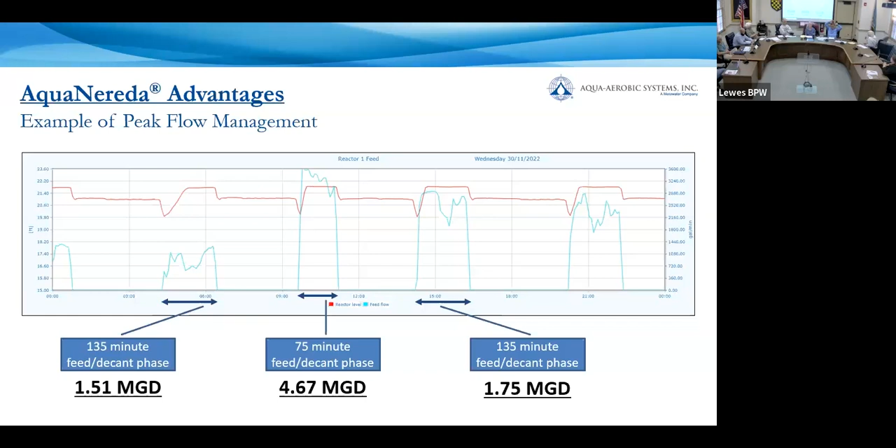So the cycle structure shortened up a bit to allow more flow to pass. Again, they get little freak storms down there, and the water goes away right away, and then it'll lengthen back out. What you have in the controller structure is essentially, and this is something we designed for, a kind of hydraulic limit in terms of how much new influent you want into that reactor. You don't want so much that you're overwhelming the biology — that food to mass ratio kind of thing. At the same time, you don't want too little food to feed it. This is just taking that onto a much shorter scale. We don't want to exceed that too drastically, so operators do not need to sit and wait for a storm to come — it'll be handled automatically.

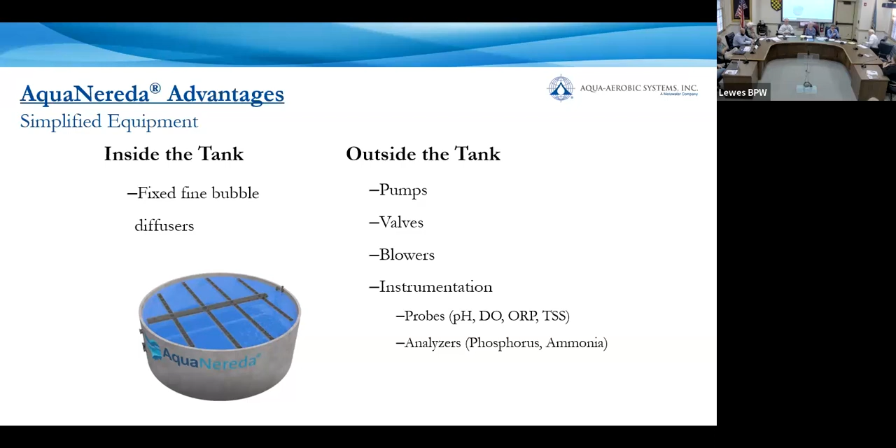Already hit on this, inside the tank equipment versus outside the tank — diffusers inside, outside. I went over the instruments, and again that was the big change we made, from ammonia analyzer standards to ammonia probes. Everything else is pretty standard here. Blowers are flexible, whether it's centrifugal, turbo, or hybrid. It's really going to be dependent on the size of your system and any other restrictions you may have.

Also already hit a little bit on how we start up. We're seeding with conventional activated sludge, and generally you're going to gradually increase the hydraulic and organic load to it. We can start up at whatever your full flow is at the time — we just need to seed it appropriately. So when I'm looking at seeding, I'm looking at my food to mass again to make sure I'm within an appropriate range. If you want to meet your startup at, say, 1 MGD, we'll seed it to ensure we can add a good food to mass ratio. The other option is you use less seed and you gradually send more flow to that system as that sludge increases and as we granulate.

The granulation process does take, we say, 3 months to be fully granulated, and that means that 70% of your mixed liquor concentration consists of those granules.

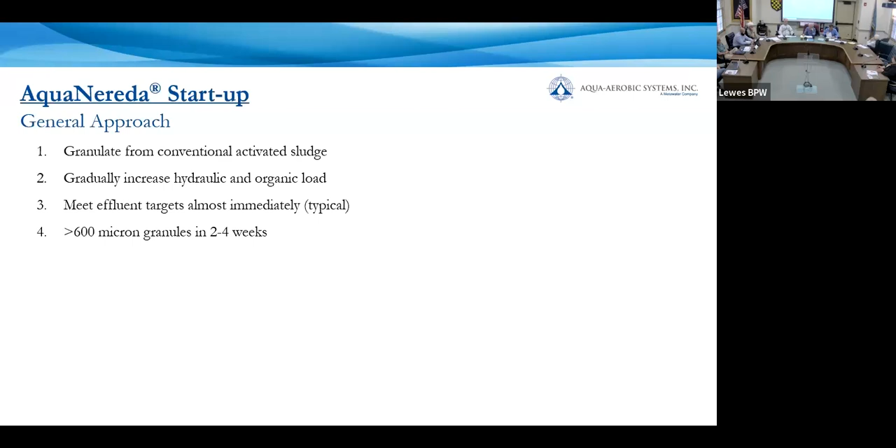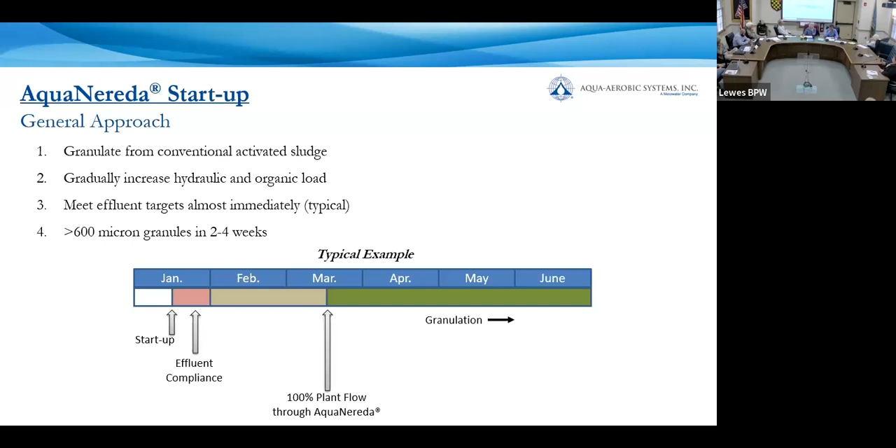So this was actually Wolf Creek. We started up in the middle of January. They were taking their first samples probably a week or two later, and were meeting their effluent needs then. Then they took a bit of time — it took them 6 weeks to divert their flow, although they were maybe about 2/3 to 3/4 design flow back then. I'd say we took a little bit longer there; it was our first startup, and I think we were pretty conservative looking back now. I think the Wolcott plant was in about a month, and then you just really are focusing on granulation and then long-term operation at that point.

When we're seeding a plant or starting up, we want to know what that seed sludge is, and be cognizant of your effluent requirements at startup, whether it was your existing permit, what the design objectives are, if there's going to be any sort of interim or lax permit during that startup phase. That's all going to kind of dictate how we're operating. Characterizing the seed sludge is important. If you seed with digester sludge, you can definitely expect a greater propensity for foaming and scum at startup. If you're taking CAS out of a well-run conventional system, you shouldn't have as many issues there.

So that's something we try to keep in mind and make people aware of.

Would we be operating our regular system to create the sludge? Every plant is going to be started up differently. Like Wolf Creek, they had an existing system there, so they're not going to pull in sludge from a nearby community. They're going to use what they have, and they just pulled some and dumped it over into those reactors. Other plants are completely greenfield installations, and they do have to haul in sludge from a nearby plant. You're usually not looking at much, maybe a dozen trucks or something. It really depends on each site and what your startup conditions are.

I know you guys still have a lot of ideas on what may happen here, whether it could be some retrofitting, existing site work, or a greenfield site. You're going to need something to treat, to keep treatment occurring until the Nereda is up and running. So you could take sludge from that MBR, or you could go to a nearby community and grab sludge from them. You can use WAS or the digester sludge that's higher concentrated, so you need less of it. Just keep in mind it may take another couple of extra weeks to turn that over.

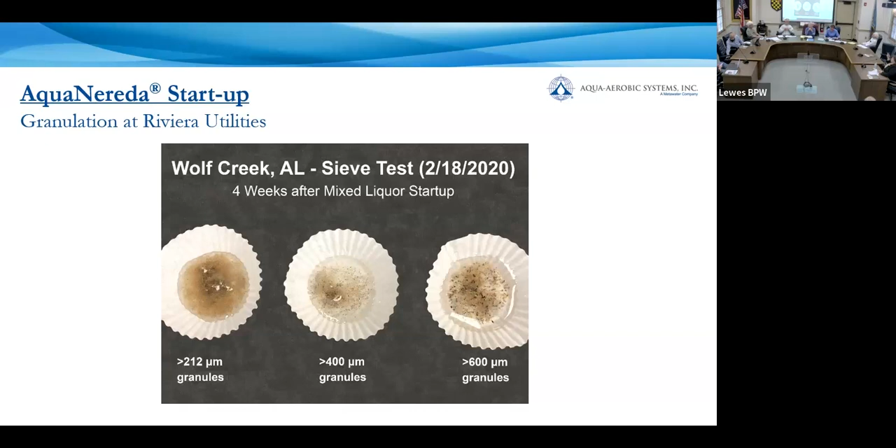But give it another few weeks—and actually this one is pretty late here, it's all the way into October—you can see it looks like our demonstration reactor after 3 years. It's very well granulated, with nice big granules. Usually we stop measuring at a 2 millimeter sieve; I think our lab at Aqua will go up to 4. So that's well under a year, and it's very much considered a mature plant.

This is how that granulation concentration increased at startup. We start off with pretty much no granules, and this is all, of course, contingent on your testing methods. I think things were a little rough at first here—you shouldn't really have that high of a mass here—but what you see is a pretty rapid increase in that granulation.

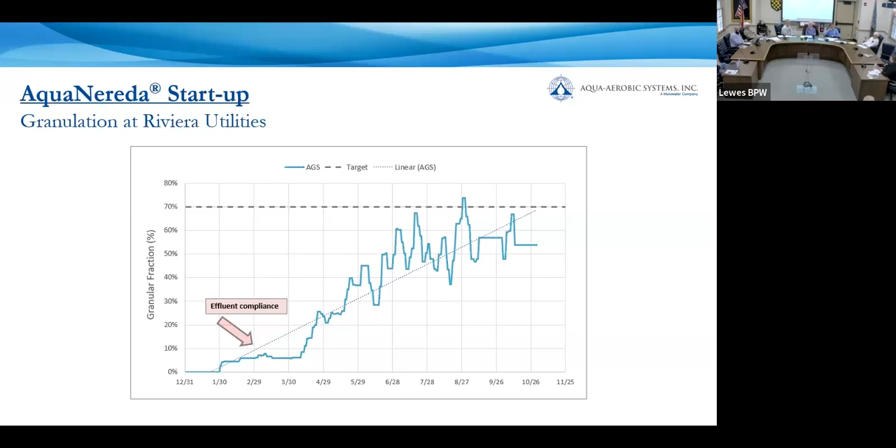It looks a little bit like a hockey stick. I think we were a little slow here, probably due to it being our first plant, but you can see how quickly it gets up there. It took about 5 months to get there. Most plants are about 3 months now that we've got some good experience with this.

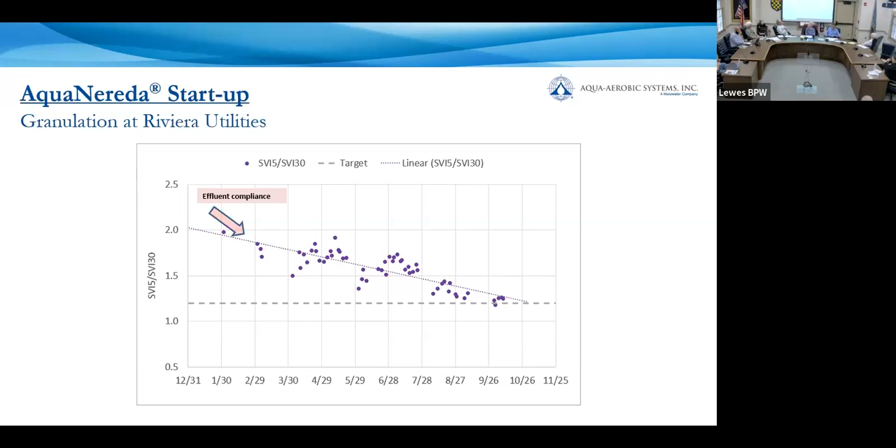This is another metric we use, called SVI, sludge volume index. You take it at 5 minutes and 30 minutes—it's essentially a settling ratio, the settleability at 5 versus 30 minutes. What this shows is that we get most of our settling done in the first 5 minutes, and there's very little occurring in those next 25. That's like that side-by-side I showed where the conventional sample kept going and going—it needed all 30 minutes plus to settle.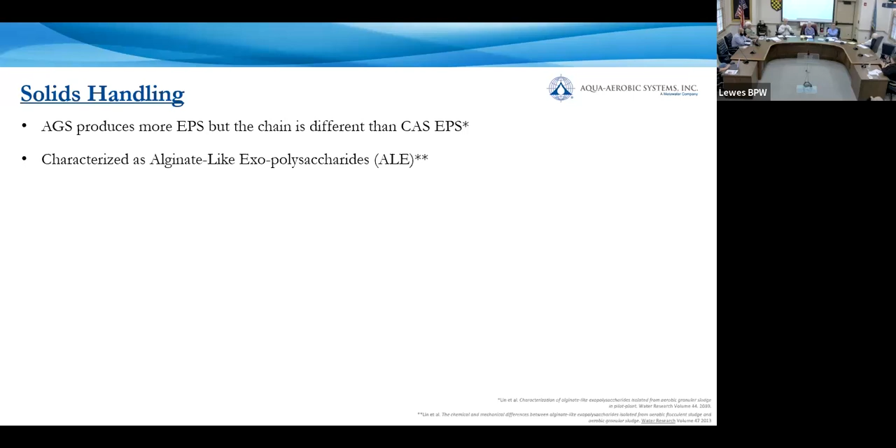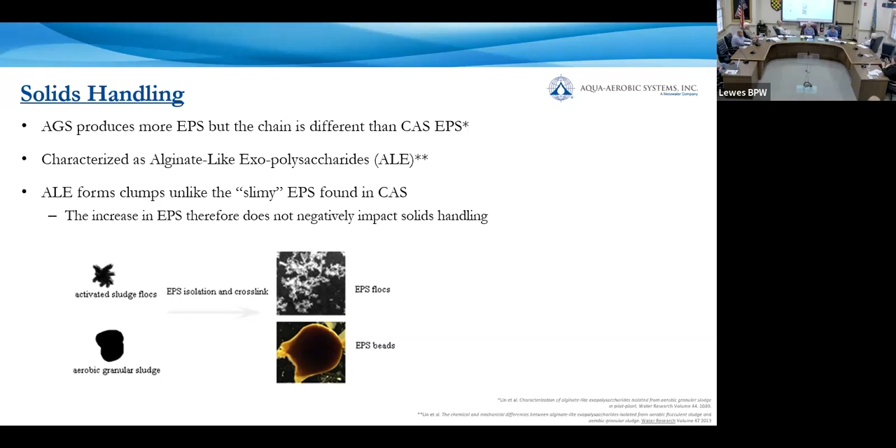On the digestion side, aerobically—and this is where I said earlier we perform similarly or better than conventional activated sludge—the VSS destruction is similar. We're not increasing our sludge yield; the sludge we produce and need to waste is similar to conventional sludge, because it's the same biology.

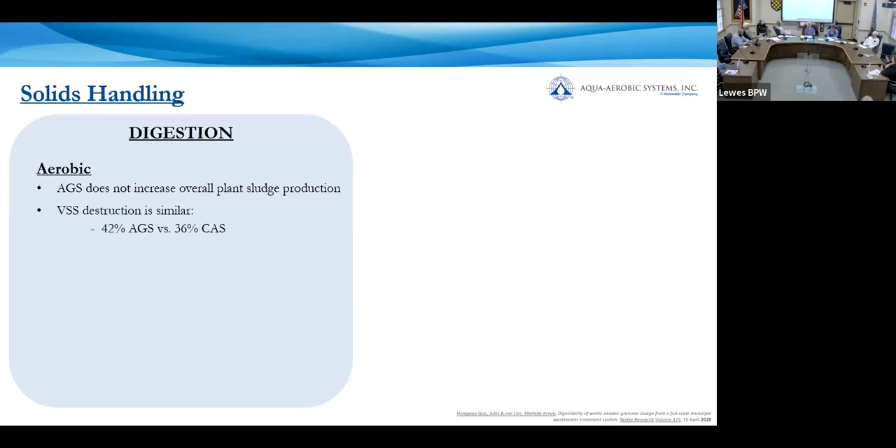Anaerobically, we get a little more methane production, because most of what we're wasting out is very light and biodegradable—more of that cellulose fibrous material. Long term, you do waste out some granules though; otherwise your system will just keep increasing your mixed liquor, and it'll be too much for your bugs to support. They won't have enough food coming in, and that's fine.

More methane production—does that mean more odor problems?

This is specifically looking at anaerobic digestion. So the sludge that comes off the system and goes into solids handling, something needs to be done with that. Not all sites digest, some plants dewater, some plants just cart it off site. When people are anaerobically digesting, it's usually a larger plant, they want more methane production because it's for energy. What it's called is cogeneration. They're producing their own energy at their plant. So that methane production is energy that their plant is using to run.

It's actually a positive, and it's not actually linked to the Nereda really in terms of odor. You definitely want to keep your digesters. You probably want to have an anaerobic digester covered, but that's actually a benefit there.

The odor concerns with Nereda, it's not odorous at all. Odor concerns on a plant come up front before you start getting into your pre-treatment. It's in the primary area of the plant.

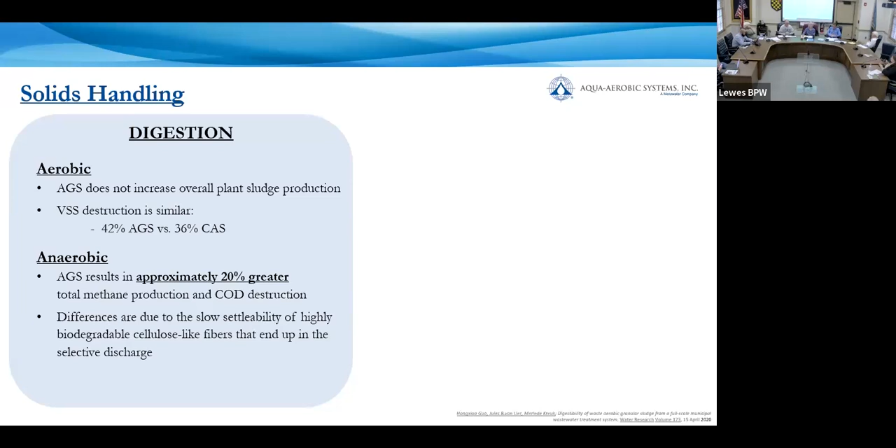On the dewatering side, this is what most sites will do. Maybe not all sites digest, but they'll either thicken or dewater. And you see a good reduction in your polymer use and or an increase in your dry solids production.

The Wolcott, Kansas plant, they thicken on site using a rotary drum thickener. They started that up maybe 4 months after the Nereda, a few months afterwards last year. And they started dosing it at, I want to say, 4 pounds per dry ton, because that's what they do at their other plants in the Kansas City area, their county. And it was thickening up to the point that their TWAS basins, the aeration system, couldn't keep up with it. It was just popping up some bubbles. It wasn't getting everything aerated there.

So they just had to keep reducing the polymer use. And now they're pretty much between usually about 1/4 to 1/2 pound per dry ton, which is a very low amount. Essentially, it took them 1 year to use a whole chemical tote of that, which was very insignificant relative to their other installations. So we have data on that to share too.

Unfortunately, we don't have tons of solids handling data from the US or even in general, just because operators don't always test it. It's not permitted for a lot of things. It's the data that I have, but I'll send some stuff on that.

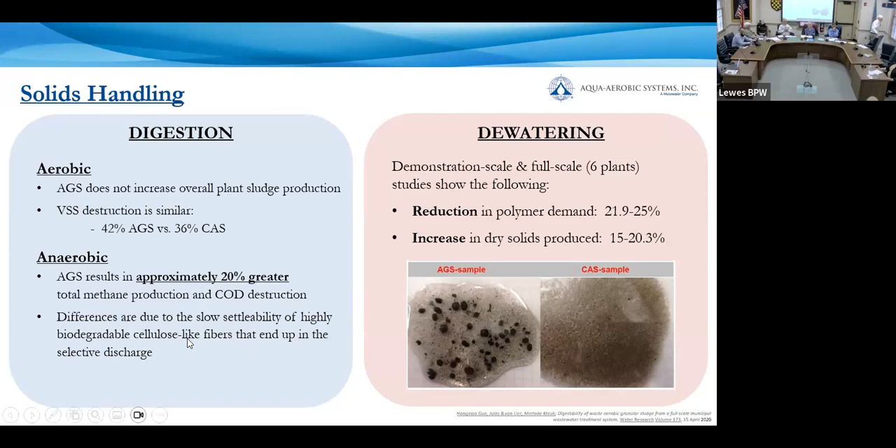In the Lewes, Delaware folder, the top, all the way at the top, Lewes, Delaware. You guys got your own special folder. And then, yep, perfect. Preliminary design, second one up. Perfect.

Actually, maybe I should go over there since I'll have to scroll through it. I can talk through it with you guys. So, okay, I would jump onto page 5 of 14.

If I can first, Paul, let me just explain. Yeah, please, go ahead, how we'll build this. I'm jumping into this project specific here.

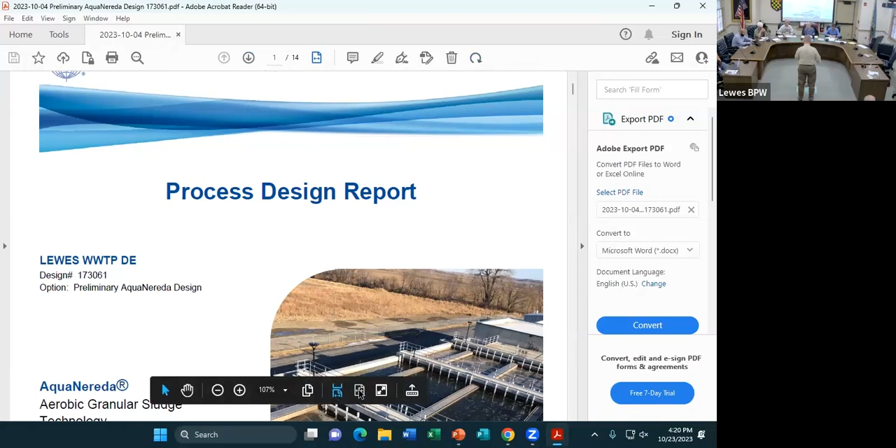In your questionnaire that you sent to us under design parameters, it had an average daily flow of 1.75. Austin and I worked together to try to find out what we needed for the peak flow rate, not just the average. In our overall design, we want to look at what the max month is, because you have to treat that condition.

So I was able to find the original specs for the MBR. With the 1.75 for the membrane bioreactor specs, it said the system had to be capable of treating up to 1.2 times the average daily flow. So I took the 1.75 times 1.2, and that's how we came up with the 2.1. Then the max flow scaled equivalently to what the MBR specs were on what flows had to be handled.

So by no means are we locked into that. If you have something more you feel is more accurate, we can adjust. Paula can kick you out a new design and update the budget pricing very quickly. Austin, Paula won't be doing it, another engineer will be, but I can tell her too, it's Paula's department.

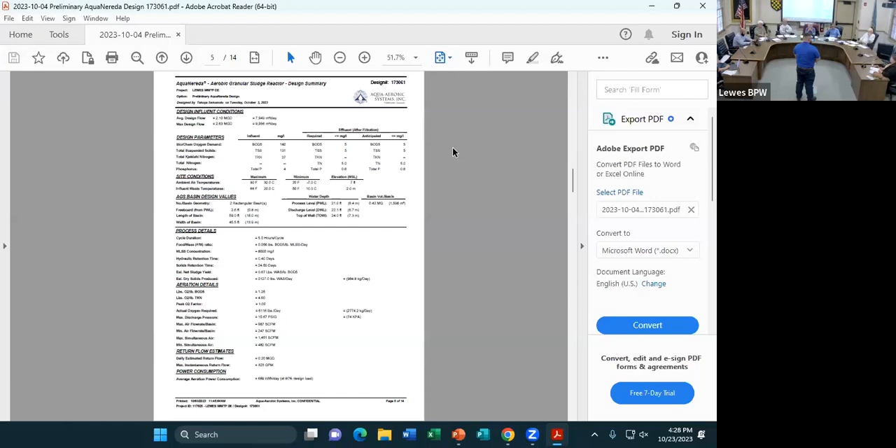So we're still going to guarantee these at that higher flow as well. Okay, and the phosphorus guarantee without the filtration would be at a 4? No, that's your influent—the 4 is the influent there.

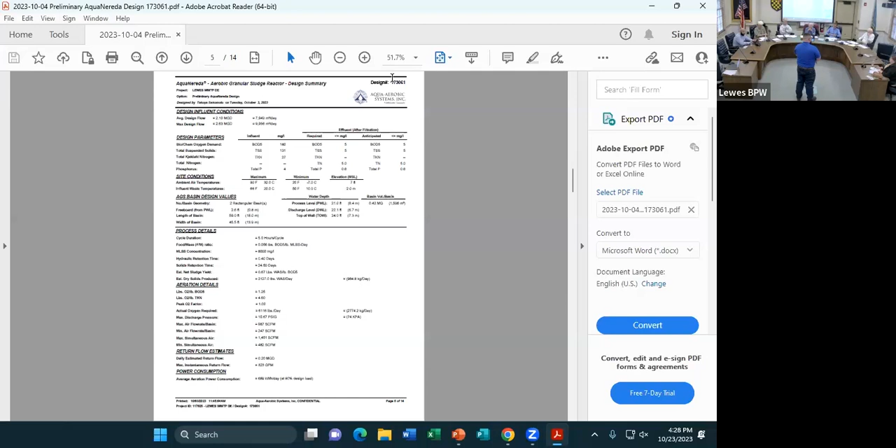So without filters, we can still do the 0.6, but we'll need chemical to guarantee that. So we can either do chemical or filters to hit that 0.6. And then with the chemical, or with the filters, obviously you polish out the particulate though with that.

In terms of effort, maintenance, the O&M on the filters is pretty simple. I did actually have that in the presentation too, a bunch of filter stuff, but those are just workhorses—we've got a few thousand of those out there.

This group is going to see some of your disc filters on Thursday. Oh, very nice, that's exciting then. So you'll get to see the disc filters. I think they're fantastic. New Castle County? Yeah, Berlin, okay.

Berlin. Very, very slight enunciation, emphasis there. Berlin.

Yeah, so the disc filters polish it up a bit. Those have been around for 30 plus years now. They use a very high quality cloth. Just for a quick filter background, anyone can design a decent filter, it's really that cloth that actually does the filtering. The mechanics is one thing. So it looks like carpeting, but it's a truly engineered fabric.